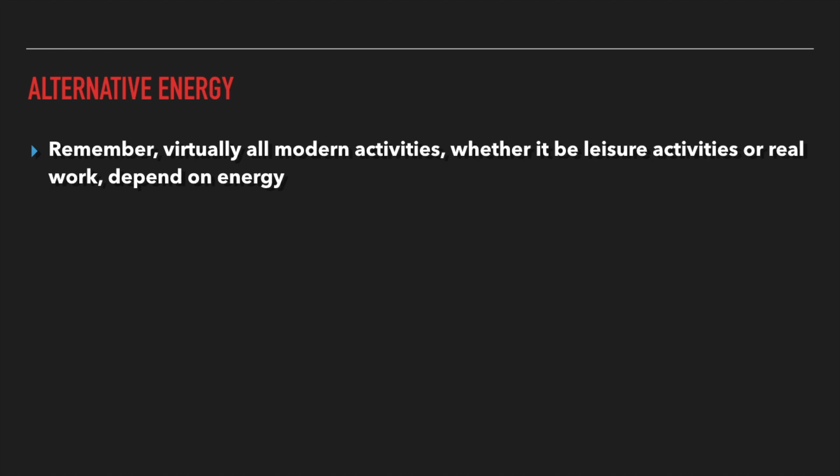What we have to remember is that for all kinds of activities in the modern world, whether it's transportation, leisure, or real work, everything from watching TV to driving your car to doing everything except going for a walk depends on energy, and we use fossil fuels as the go-to method for powering everything.

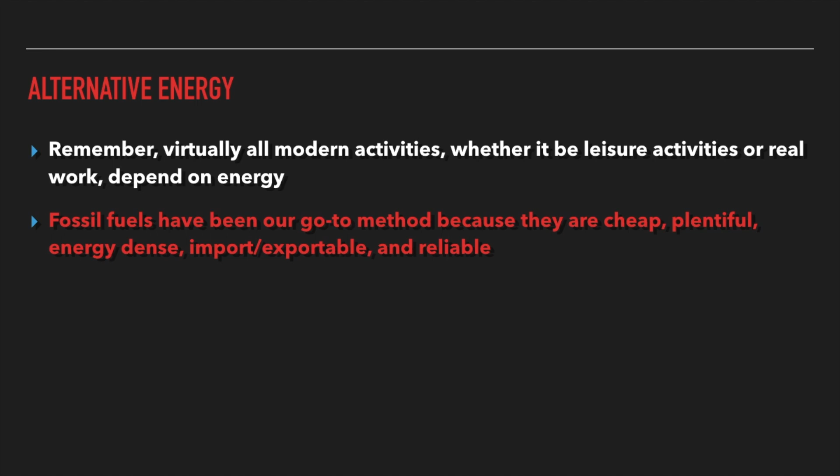The TV is powered by the electric grid, which runs off of coal and natural gas in this country for the most part. We do that because, as discussed in the last lecture, fossil fuels are cheap, plentiful, energy dense, easy to import and export, and reliable. They'll produce energy all day, every day. The goal is either to create mechanical power, which is what your car engine does by burning gasoline, or to make electricity, which is what burning coal and natural gas also do in our electric generators.

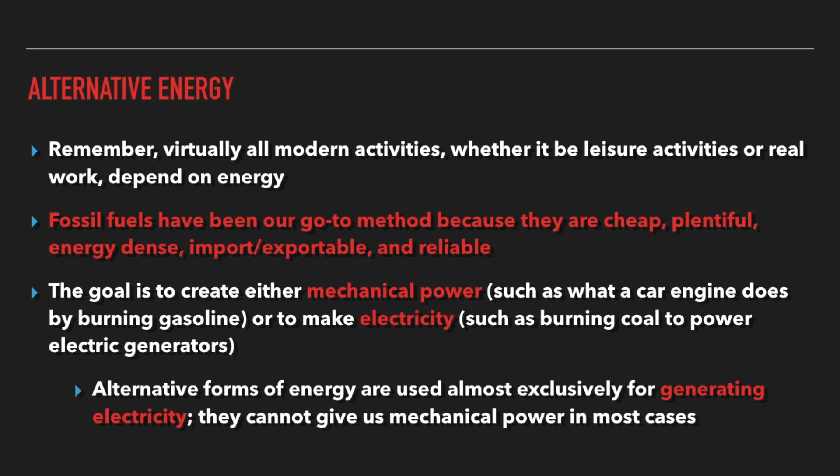Now, alternative energy forms are used pretty much exclusively for generating electricity. Alternative energy cannot give us mechanical power in most cases. So there's no solar powered car - that just isn't possible. There's no uranium powered car, although Ford did obsessively try to develop a car that ran on nuclear energy in the 50s and 60s. You can look that story up for yourself.

So for the foreseeable future, alternative energy can solve many of our electricity needs, but not our transportation needs. That just isn't going to happen. The electric car, I don't believe, should be considered alternative energy, because while maybe it doesn't directly run on fossil fuels, it runs on a battery.

Those batteries are going to be charged by fossil fuels. So to charge an electric car battery with something like a rooftop installed windmill or rooftop installed solar panels would take so much time that it's just not practical, because most of us have to drive every single day. Those just aren't going to meet the need.

But our electric grid, which runs mostly off of coal and oil and natural gas, is going to be able to do that, because ultimately the source for that electric car comes from fossil fuels.

But anyways, the most electricity intensive device in your home is the air conditioning, and if you have electric heaters, the heating. The next most intensive would be natural gas. So in my home, I have central air - there aren't floorboard heaters in the rooms. So the vents either blow cold air from the air conditioning, which uses electricity.

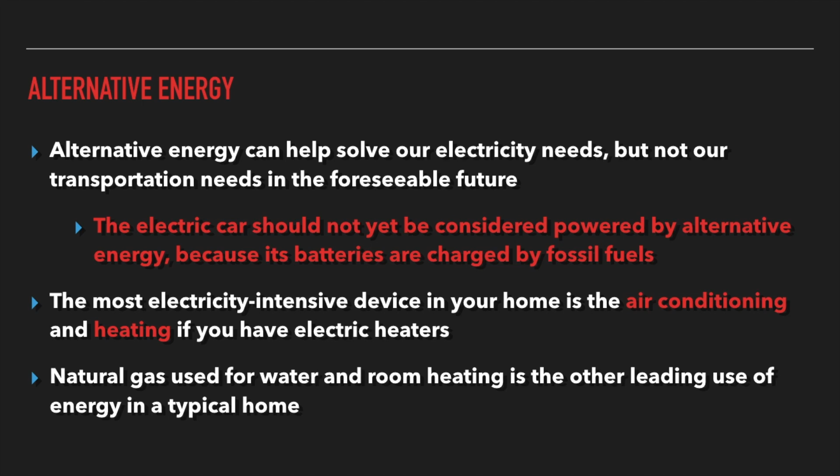Technically, if we have enough hydroelectric dams, nuclear power plants, and wind turbines, our energy grid could be powered mostly by these things and then power our electric cars that way, but it's difficult to say if that's going to happen or not. So transportation, we're not going to be focusing on. This entire discussion, we will be looking at how alternative energy generates electricity - that'll be virtually the case for everything.

We haven't moved away from steam power ever since the Industrial Revolution, where we really harnessed that - that's still basically what we do today. You burn that coal, it heats up water, it creates steam.

That steam is piped through and makes a turbine spin around. A turbine is just a system of fan blades, basically, and that steam turns the turbine. The turbine is then connected to the axle or drive shaft inside an electric generator, and that produces electric current.

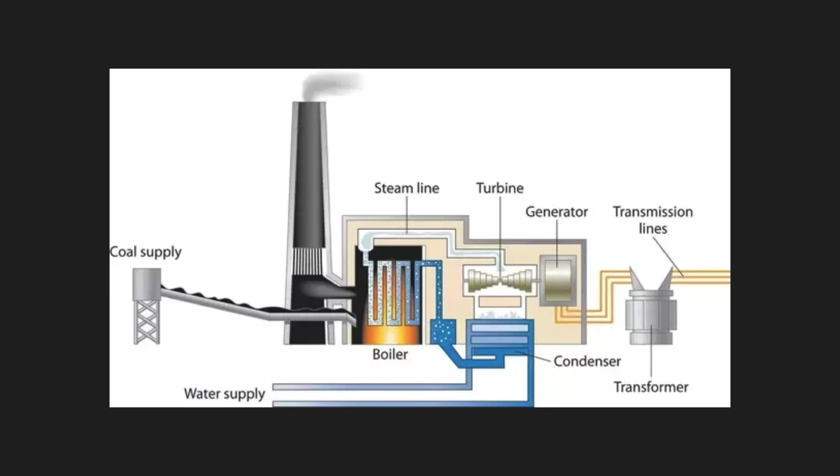So, electromagnetism - we've known about magnets and electricity forever, but it wasn't until the 1800s that we figured out they're really connected. You can use electricity to generate a magnetic field and vice versa.

So what these things do is you get that drive shaft spinning, and that spins the magnet, and that creates an electric current.

Electricity and magnetism - there has to be movement associated with that. They won't create electricity if they're just sitting there, but if you incorporate some movement into it, then it will work. So that's how virtually all, or at least the majority, of these alternative energy forms and fossil fuel electricity generating forms work. They're just trying to get an object to spin like this.

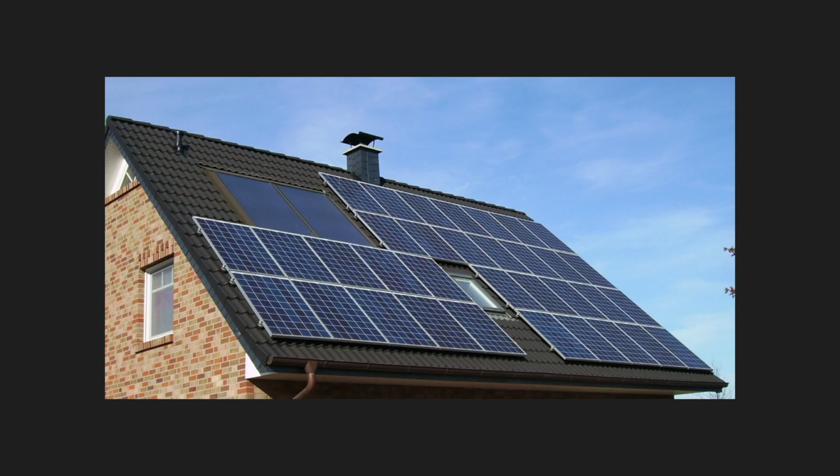Now, if you live much further north than what we do, solar panels are a terrible option, because for so much of the year they're not going to be producing energy or generating electricity for you - it's just not a great option. Now, luckily, it's pretty far north that you'd have to go, quite a ways north. You'd have to be all the way in Alaska for that to not make sense for you to do.

The other problem that we have was - let me see if I have something here.

No, I don't. That's weird.

The other problem with solar panels, I forgot to add this: for the most part, most people have jobs, or if you don't have a job, you're probably in school like you guys, for most of the day. So at home, from around 8 in the morning to 4 in the afternoon, that's peak solar energy hours, the peak time where your solar panels could be collecting or making electricity. But nobody's home to use it. All the lights are turned off, most of the devices are turned off, so this electricity is sort of being wasted.

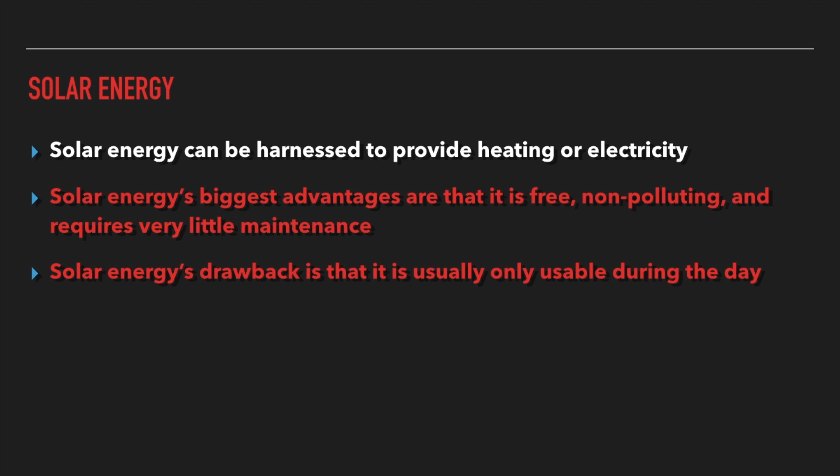Right now, we don't exactly have great methods of storing that electricity. If we could capture it throughout the day while you're gone, and then come home and use it, that would be perfect. There is a program, some technology for that. I'll get into that in a little bit.

So anyways, these are solar panels. We all know what solar panels look like. You've probably never seen them before. I have only seen solar panels a few times myself. Nobody around here really has them. But there we go.

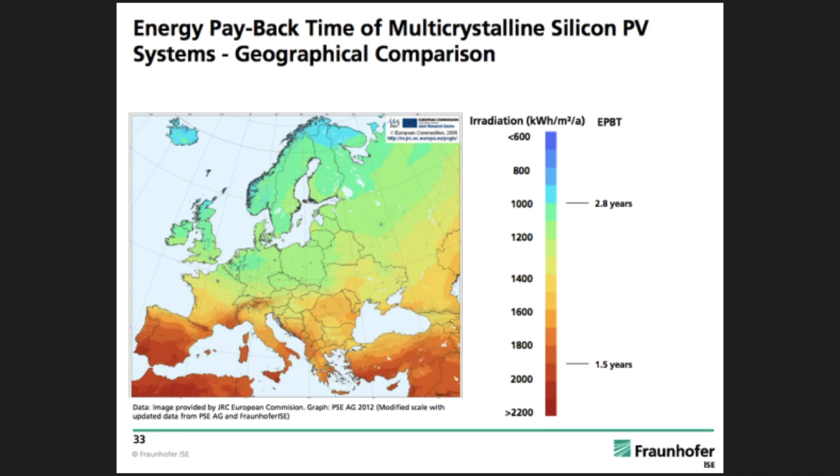Potentially, I don't know if this is based off one or two units, but if there was a blackout, maybe you could go an entire week. You'd probably want to be smart and not use the TV very often, because what you need is to be able to cool or heat your home and have your refrigerator working. TV can wait. But never mind solar panels and alternative energy — blackouts are very rare, but they do happen. This is a rather smart idea for any of us if it could store that much energy.

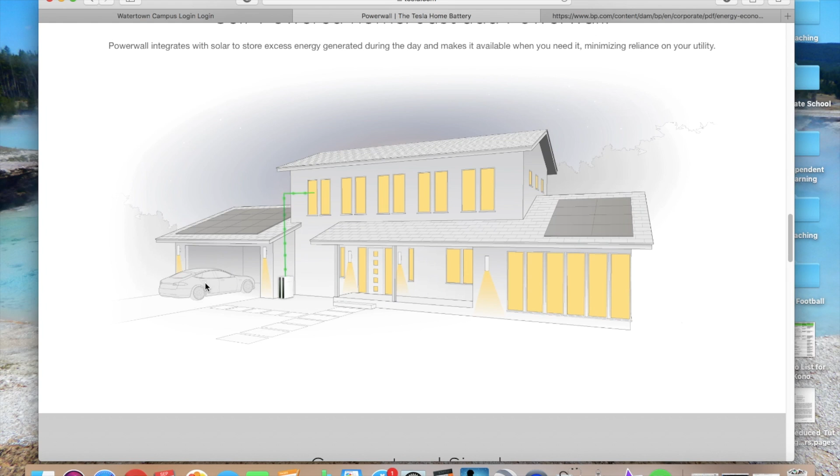So here in this image, we can see solar panels, and they're constantly feeding electricity into the device. Then you come home where it's dark, and your solar panels aren't directly giving you any electricity, but your battery pack is. If we look in the interiors of these things, it's really simple—just a gigantic battery pack with only a couple other things in there. Very simple, very low maintenance.

That's the other great thing about electric cars and electric motors—they have very few to no moving parts. A solar panel has no moving parts whatsoever. They just sit there.

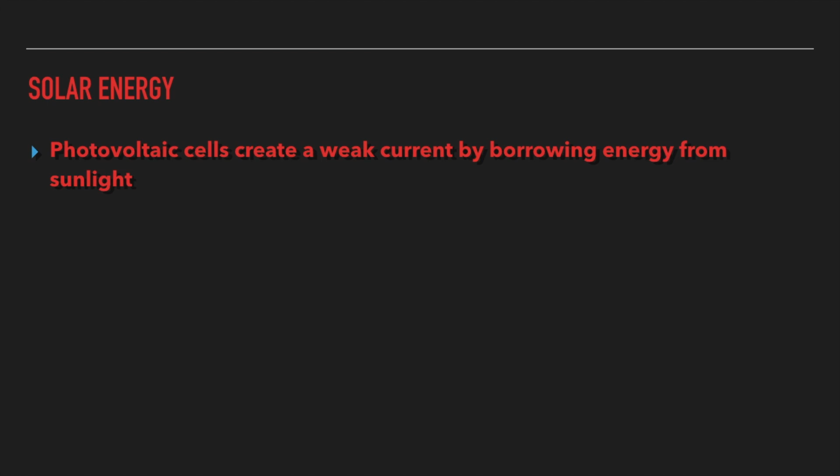Solar panels are made of what are called photovoltaic cells. I really don't know how they work, but the sunlight strikes them and it basically acts as a weak battery and creates a constant trickle of electricity.

But we don't necessarily need to be making electricity. We can also reflect light and concentrate that light to a tower, which if you concentrate a lot of sunlight with mirrors, it gets incredibly hot. So this is just another way of making steam.

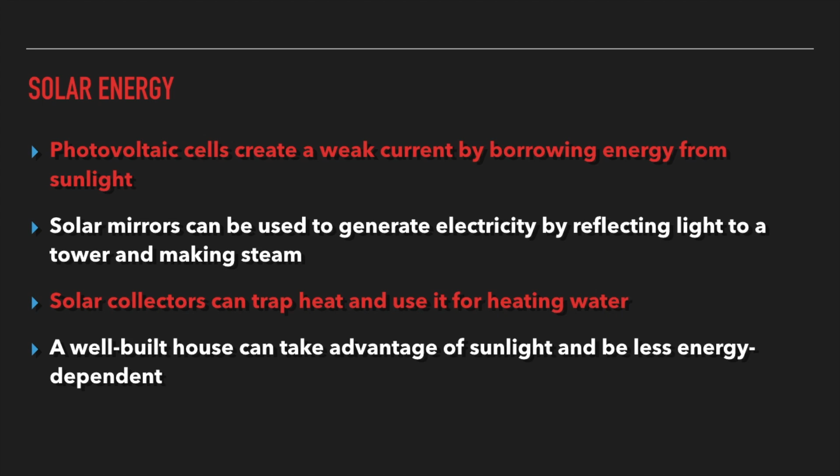A solar collector is basically a black box that can go on the roof of your house, and if you live in a place that's warm year round, it can trap enough heat to heat water—which is a significant use of electric heat or natural gas in homes. A well-built house can take advantage of sunlight and be less energy dependent. So that's another way we can harness the sun.

Here's a diagram of a photovoltaic cell. Again, I really don't know how they work. I know how batteries work—it's a flow of electrons through the battery, and they go dead when the electrons are evenly dispersed. Somehow these photovoltaic cells are able to make electrons basically be in constant motion, and that's what causes the constant trickle of electricity. It's very little electricity, granted.

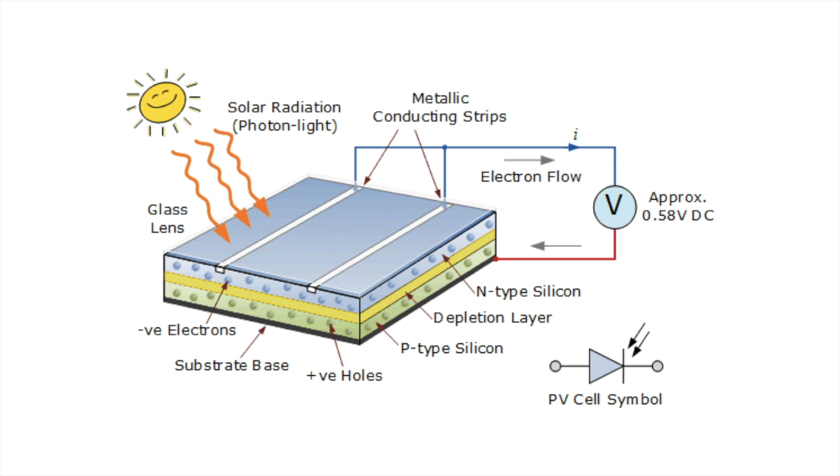This is a diagram of what a solar collector looks like. I don't have a picture of one on a house, but you can Google that and see it for yourself.

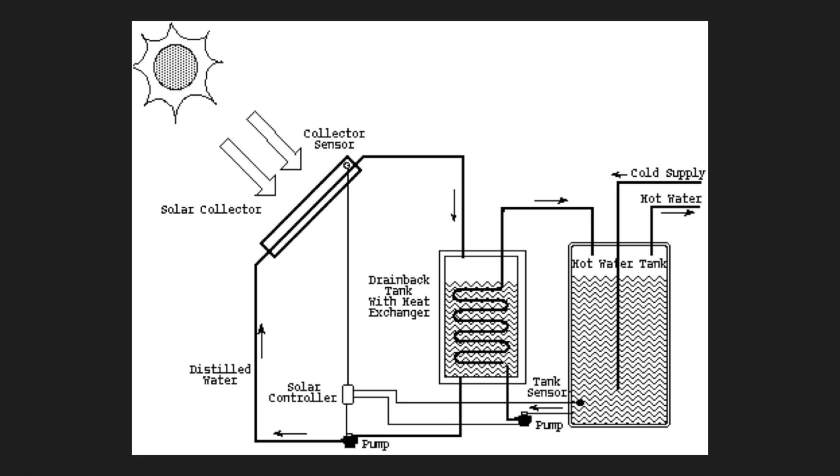This means in the winter, if you just leave your windows open, the sunlight will come through the glass, and solar, like UV radiation, is absorbed and collected that way. So you will need to burn less natural gas for heating or use the electric heaters in your home less often.

Similarly, if you live somewhere very hot—like in my house, I have south-facing windows that are really big, but I have blackout curtains that I buy, and it's pretty amazing.

For a little while I didn't have these blackout curtains, and on really hot summer days the inside of the house would get to 80 degrees by 10 or 11 in the morning. Now with the blackout curtains, I can go until 3, 4, or 5 in the afternoon before I even have to turn the air conditioning on. They work very well.

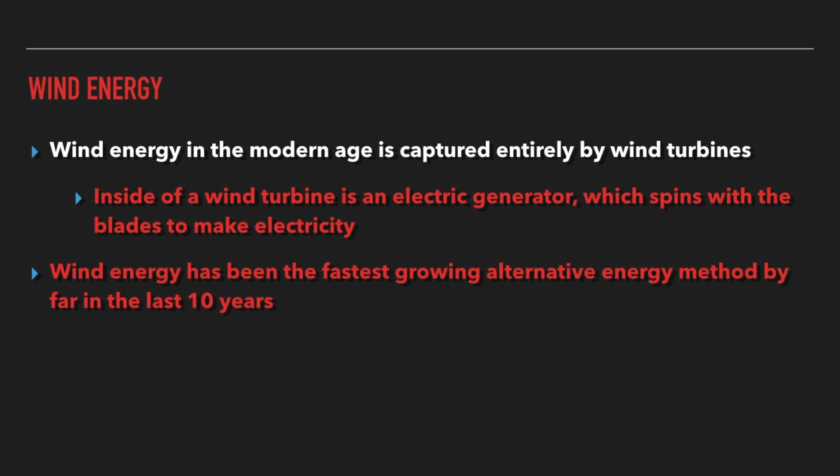It's crazy. I drove this summer from Sioux Falls to a town about 100 miles east of Sioux Falls in Minnesota, and for 50 consecutive miles we saw wind turbines the entire way. It's really crazy how much they've grown.

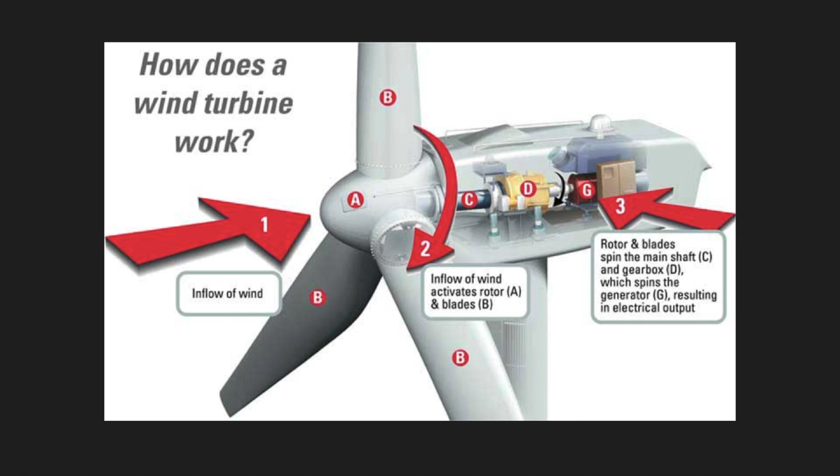So this is sort of the inside of a wind turbine. Nothing too special, just an electric generator, and down through the main shaft of the wind turbine will be the wires and everything to connect it to the grid.

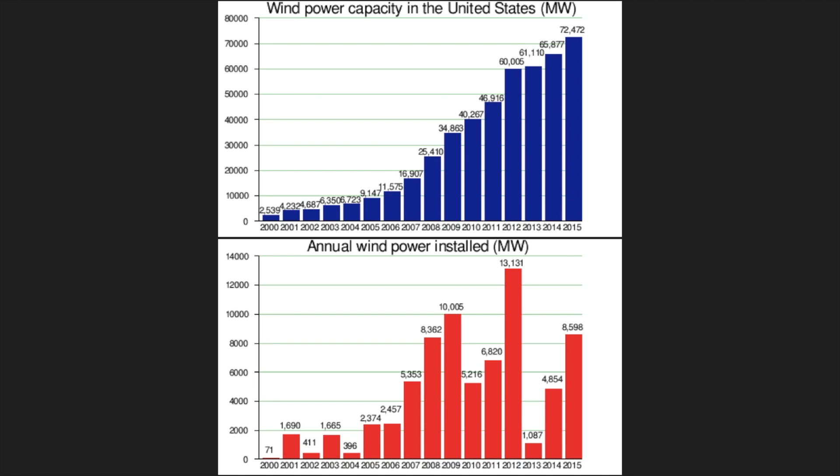So the top graph is the overall capacity. The bottom is how many new wind turbines we built, and therefore how many more megawatts are produced from that. So the top is total, the bottom is growth from one year to the next. From 2012 to 2013, we didn't lose any wind turbines or anything like that, we just, I don't know why, built very, very few of them that year for some reason.

In the United States, as far as wind producers go, Texas leads the way with something like close to 45,000 megawatts, which is a huge number. Texas is one of the biggest states.

It's a pretty flat state, not bothered by lots of mountains or anything like that, so they've got quite a large area to spread all that stuff around. Iowa is number 2, which is pretty surprising. South Dakota, where we are, ranks number 17. Connecticut and North Carolina are the only 2 states that do not produce any electricity through wind, which is kind of surprising, but they'll get there one day, maybe.

The drawbacks with wind power are that the supply is intermittent, meaning it comes and goes, and the infrastructure and land use demands are gigantic. The wind is not always blowing. Most wind blows during the day, which is luckily when we need most of our energy or electricity, so I guess that works out. But it comes and goes at random times.

Getting back to infrastructure needs, it takes around 550 tons of iron and steel to produce a megawatt of power from wind. By comparison, it only takes 34.3 tons of iron to get a megawatt by burning coal, and only 5.2 tons of iron and steel to generate a megawatt of electricity using natural gas.

Oh wow, I was really wrong. So in North America, it's about 10 times more than I thought. Now that is a big number, but domestic house cats kill something like 3 billion birds every year. Billion. And through hunting, we kill millions and millions of them on purpose. And with our cars, we kill millions and millions of birds every single year. So yeah, it's too bad that birds die, but we're not gonna stop driving our cars, we're not gonna ban hunting, and we're not gonna get rid of all of our cats anytime soon. So that's another one that's just a non-starter to me. If anyone says that, pull up some statistics on how many birds are killed through hunting or even agriculture. We farm chickens and stuff, and we kill them by the tens of millions for that.

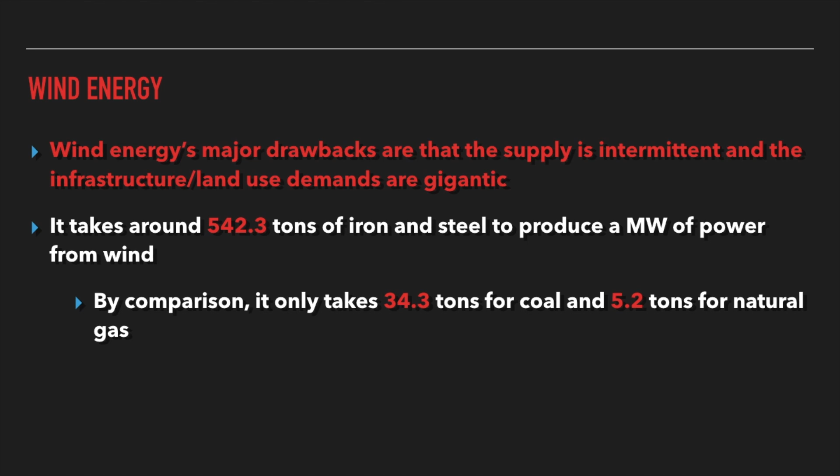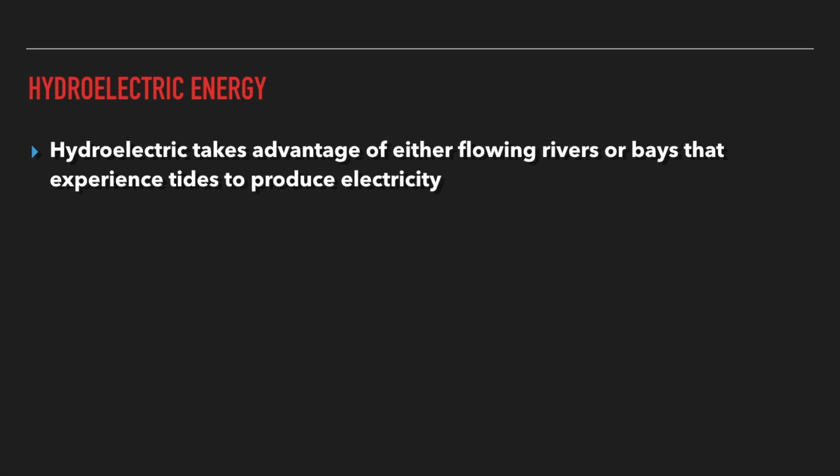Moving on to hydroelectric power. This takes advantage of flowing rivers or bays that experience tides to produce electricity. So what we do is build a dam, and it converts the high potential energy of the reservoir of water behind it into electricity by having that water spin a turbine. So there's no steam being made, but the flowing water has a lot of power, if you've ever stood in a fast-flowing river you can feel just how much power they have.

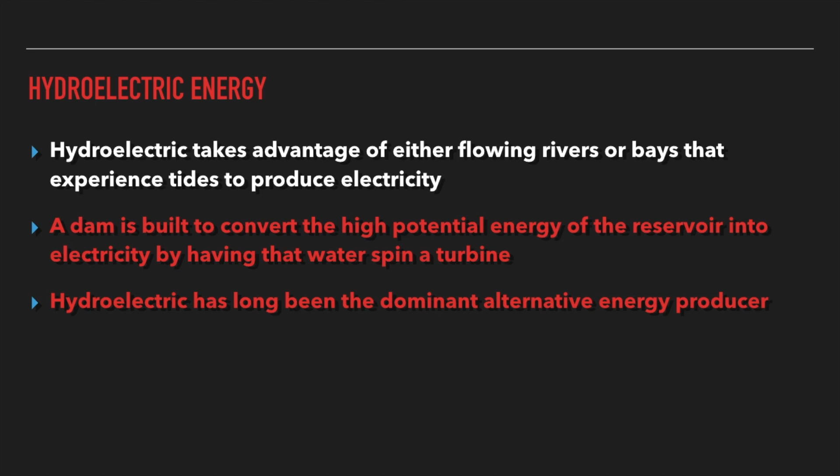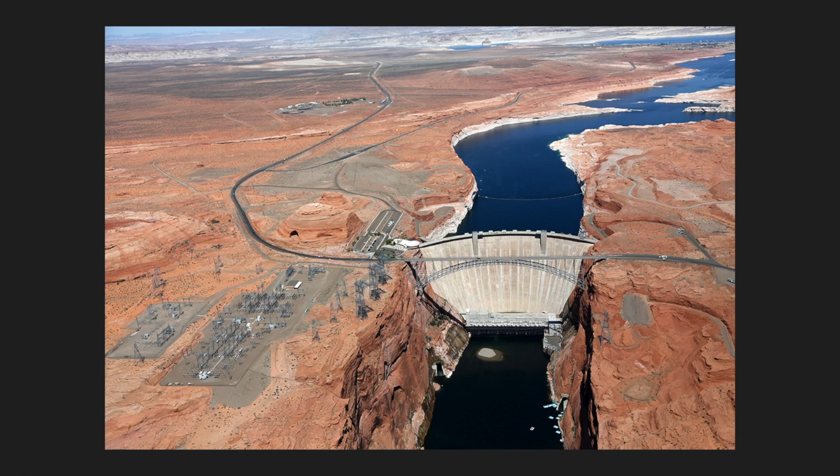So here's a dam. This isn't the Hoover Dam, but this is a dam in America, I can't remember which one. We can't see the internal guts of the dam, but I do have a picture for that. To the left of it are things I don't really know what they do, but next to power plants, we have these things that kind of look like telephone towers or poles. Those are regulating the electricity and sending it out.

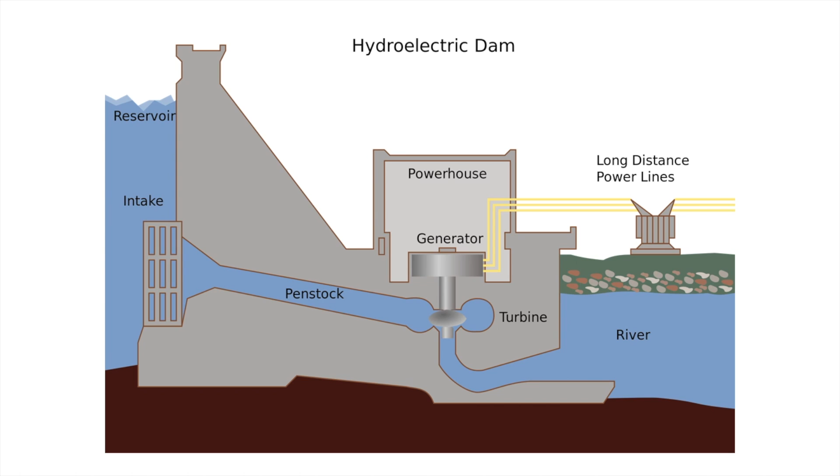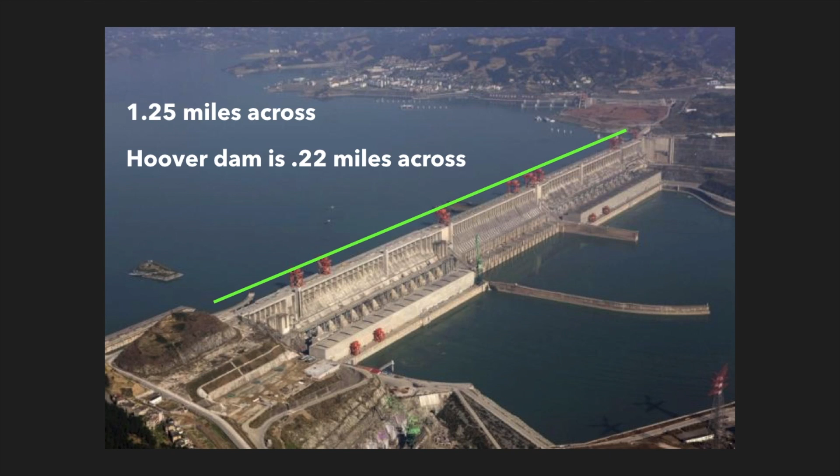This is the largest dam in the world, called the Three Gorges Dam, in China. It's 1.25 miles across. The Hoover Dam, by comparison, is not even a quarter of a mile across. This dam is straight across, whereas the Hoover Dam is curved, and dams like that curve backwards into the part of the river that's lifted up, because if you curve it, it's much stronger. In reality, I followed the curve when I measured 0.22 miles, so it's actually only 0.16 miles across.

Now this dam in China, this structure is just unbelievably huge. The amount of concrete that is in that dam, there's more cement in there than the entire country of the UK uses for all of its building projects in a year, to give you an idea of how big that is. It's gigantic.

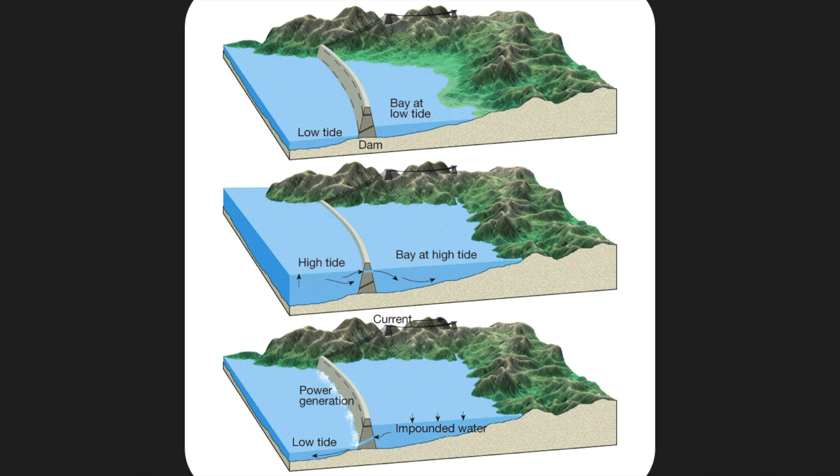Tidal power, what happens is you can do it in different ways. You can build kind of what's like a dam, and then it fills up with water, and then as the water drains out, in this example, it just drains out fairly slowly and is used to generate electricity, the same way a regular dam does.

But nowadays, with tidal power, we don't really need to construct a barrier. We can basically put underwater windmills there, and because tides flow in and out of bays, the movement of the water will simply turn these things. Now, I imagine it turns them pretty slowly, but tides are constant, whereas the wind is not. I don't know how efficient these are, but in theory, by looking at it, we can see that it's probably a fairly constant way to make electricity.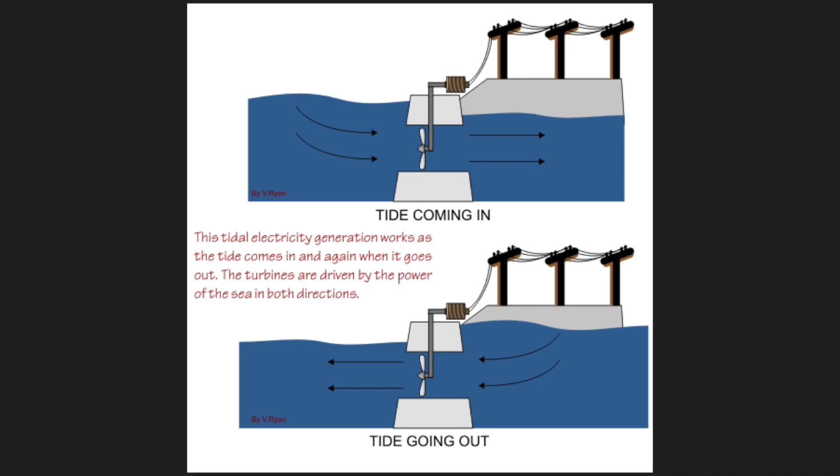The biggest advantage to hydroelectric, why it's been so successful and popular, is that the water is always flowing. It's not the case with the wind or with the sun, but the water is always there. And because when you build the dam, it's self-contained, we don't have to ship in any fuel. Like if you run a power plant, you have to ship in uranium, coal, or natural gas. But the dam doesn't, which means the electricity made from it is pretty darn cheap, which is really good.

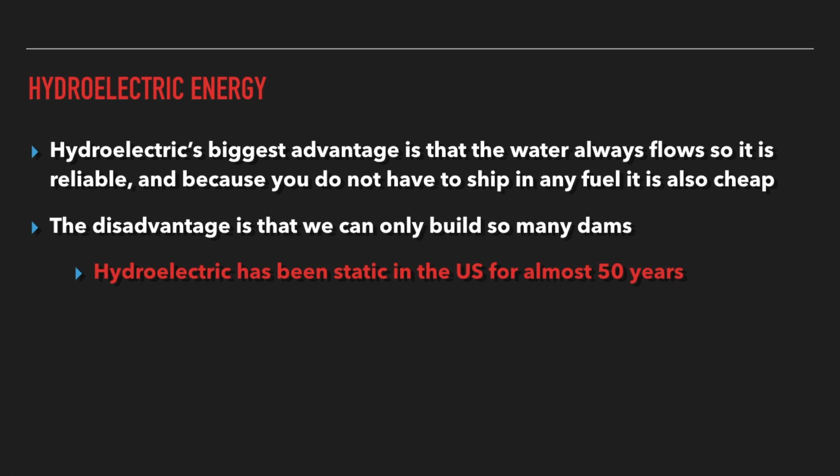The disadvantages are that we can only build so many dams. In the United States, there's virtually nowhere left in the country where we can build dams. There are probably a few spots, but it's pretty much taken up. For that reason alone, hydroelectric has been static in the US for almost 50 years. We'll go back to that picture and you'll be able to see that. Worldwide, hydroelectric accounts for around 6% of global electricity. I don't know what it accounts for in the United States off the top of my head, but you can look that up. We think it has the potential to double around the world, but not much more than that.

The other problem is you just can't do it everywhere. In South Dakota, maybe, there are dams in South Dakota. We have a few dams at Fort Thompson. There's a dam there, and there's also a dam right next to Pierre. But that's about all we can get. In other states like California, they can build lots of dams because they have high mountains and lots of streams that have a lot of energy in them, so they can take advantage of that.

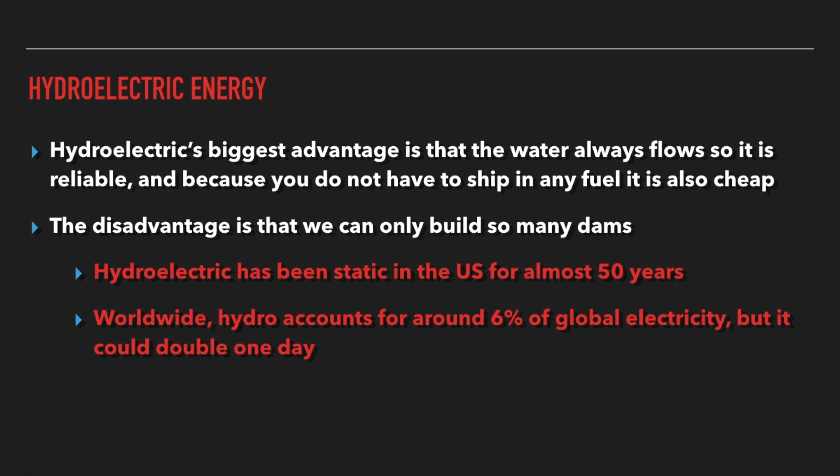The other disadvantages associated with hydroelectric power are environmental concerns. When you build a dam, that leads to an extreme rising of the river channel upstream, which clears out all kinds of habitat, obviously. And if people live there, they have to pack up and move all their belongings because their house is going to be flooded.

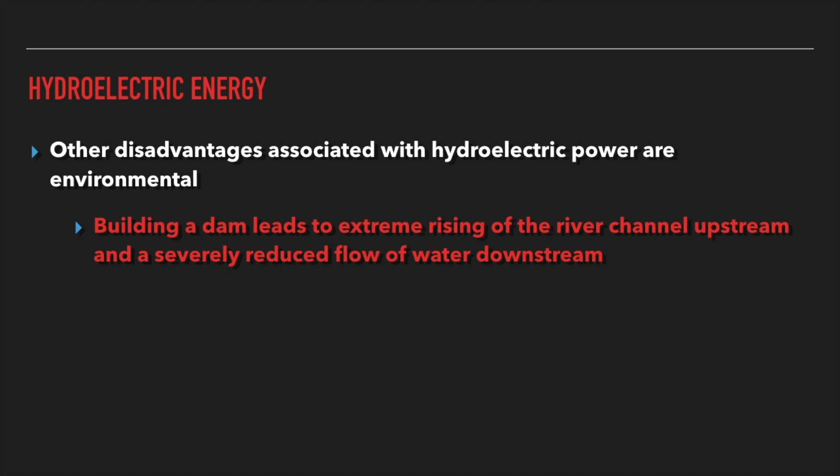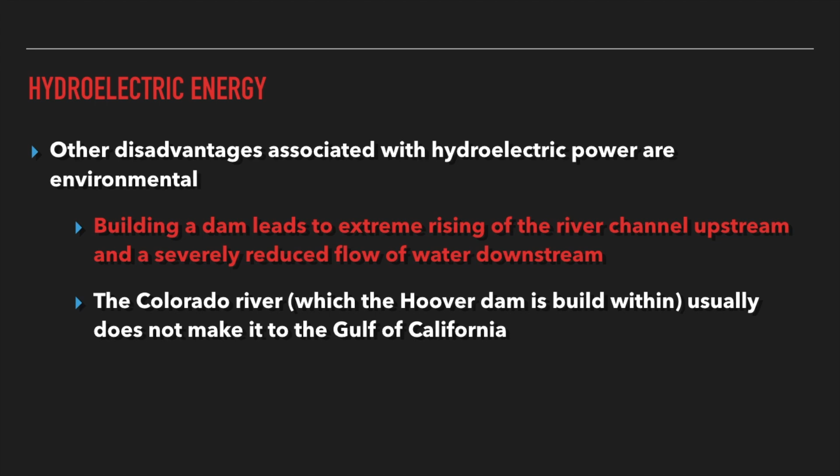For people that live downstream from the dam, a dam does not pollute - that's an advantage I should have mentioned. There's no pollution with dams, but the amount of water that flows downstream is severely reduced. For example, the Colorado River, which flows through the Hoover Dam, actually doesn't reach the ocean anymore. It has for forever and ever, but now there are so many dams built on the Colorado River that the water doesn't actually reach the ocean. The river just kind of dries up, which is a little weird.

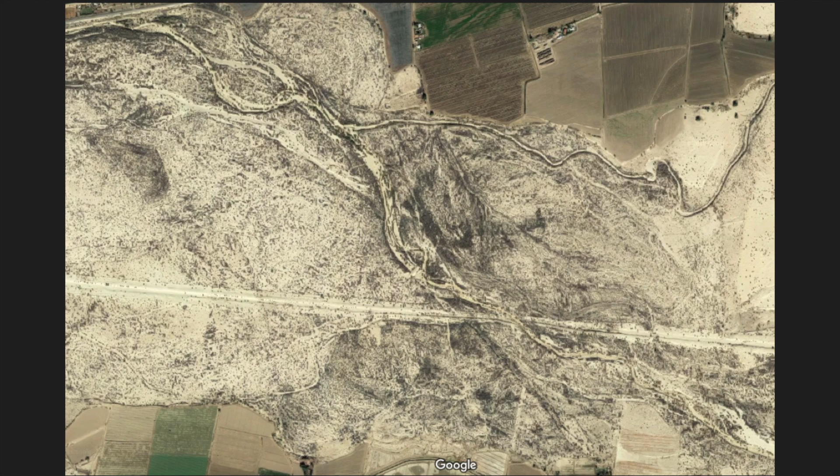But the more often you do this - and in China it's a much bigger problem - the less water flows downstream. China has a gigantic population, but many of its people still live very, very simple agricultural lives, and they're obviously hugely dependent on water. China has a communist government - yes, they're capitalist, they have a very large economy, but they are still a communist country, which basically means when the government says they're going to do something, you really don't have any choice.

You're going to cooperate with the government or be arrested or something like that. So these people that live down the river don't really get a voice in their government to say, hey, you're going to destroy our way of life if you do this. The Chinese government says, too bad, so sad, you got to pack up and move or deal with it. Similarly, with people that lived in this area that's now flooded out, they don't get a voice either to say, hey, you're going to destroy my house, the least you could do is pay us for it. There was some compensation, but not nearly enough.

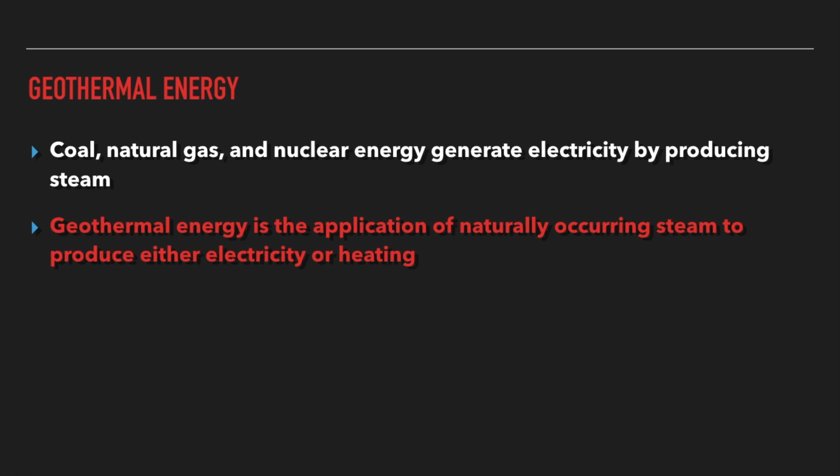All right, moving on to geothermal energy. Just to reiterate, coal, natural gas, and nuclear energy all generate electricity by producing steam. Well, geothermal cuts out the middleman - it's the application of naturally occurring steam, so we don't have to burn anything to get our steam. We can use geothermal for making electricity or just directly for heating.

I don't have too much to say about geothermal energy, but the countries that produce the most tend to have a large number of volcanoes. This makes sense because there are very few places on Earth where geothermal energy can be used. If you live somewhere with volcanoes, the magma below your feet is much closer to the surface than in other places, so the crust is much warmer at shallower depths, and there's groundwater all over the planet. So this is what makes the steam.

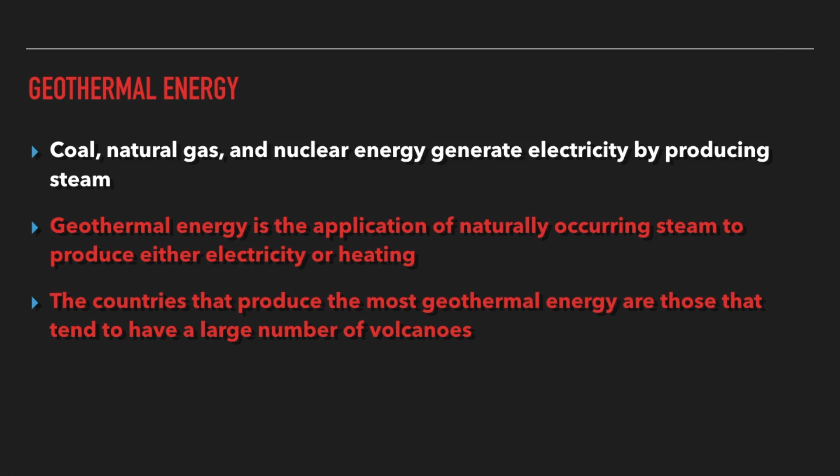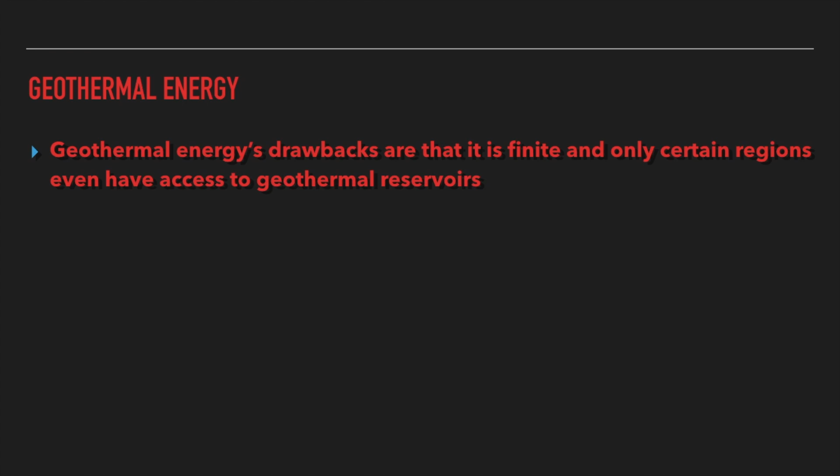The drawbacks to geothermal are that there's only so much steam trapped down there. I don't know the average lifespan of a geothermal plant off the top of my head, so you can look that up. There are very few regions in the world with access to geothermal reservoirs. In fact, there are only 12 countries in the entire world with a reasonably large capacity for electricity generated by geothermal, and it's really not very much.

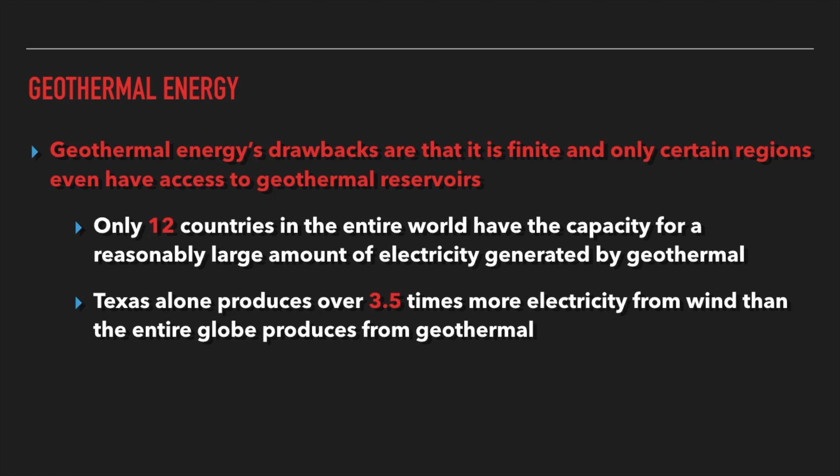The top there is the United States—I'll wait to explain that here. Just to show you how small a footprint geothermal energy has, the state of Texas alone produces 3.5 times more megawatts of electricity from just wind than the entire globe produces from geothermal energy. So it works very well for some people in some locations, and by all means, if you've got it, we should use it, but it's not the answer for the future by any means.

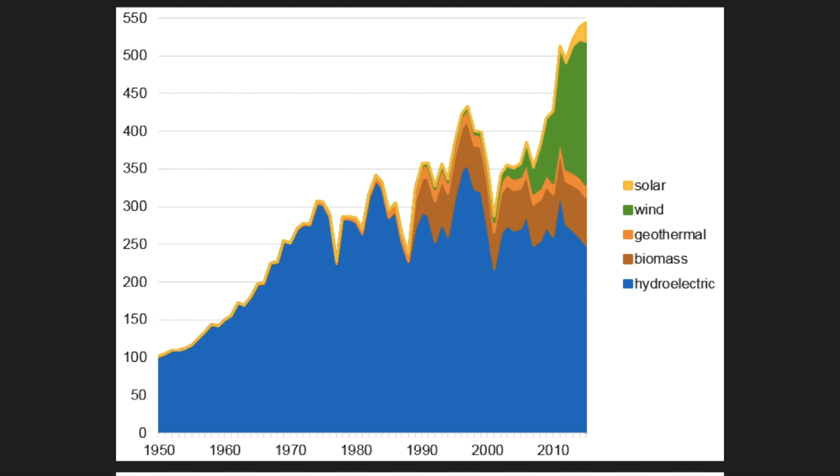Geothermal is right in the middle there, directly underneath wind, so it's a pretty narrow margin. It's been about the same width—if we look, it first really pops up in 1990, and it's pretty much had the same share for that entire period. So it's really not a growing sector.

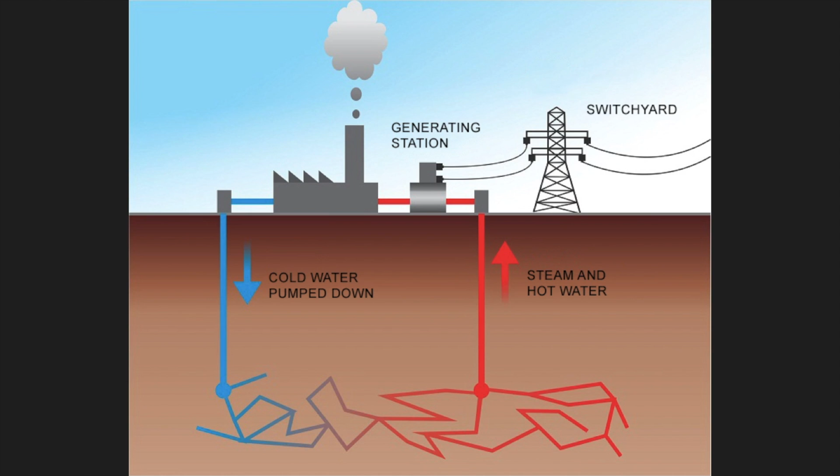Here's an example of what a geothermal plant looks like. This is in Iceland. This picture has cut away the turbine and all that, but it works exactly the same as a coal power plant, just without having to actually burn anything in there.

The other thing I was talking about is countries with lots of volcanoes. The United States actually has a pretty decent share of volcanoes, if you didn't know that. The Philippines is a system of islands in the Pacific, all made from volcanic processes. Same with Indonesia—the famous Krakatoa was the biggest eruption in hundreds of years. That's an entire volcanic archipelago of islands, north to northwest of Australia.

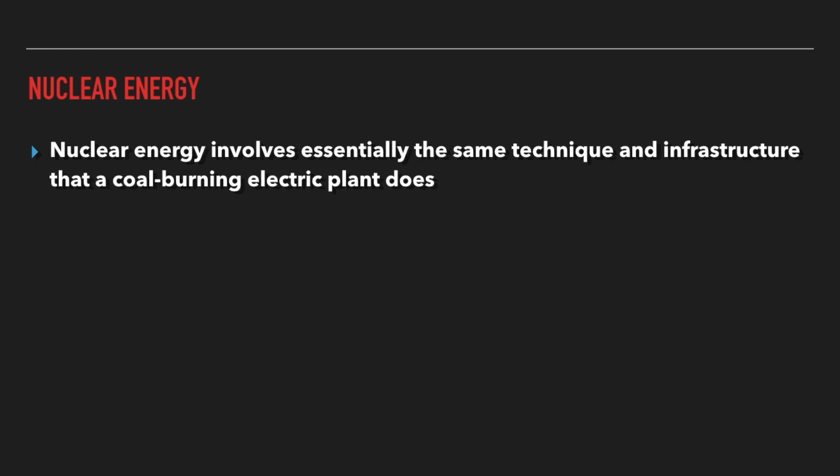Now to nuclear energy. We saved this for last. Nuclear energy, more so than any kind of alternative energy, is probably the future because it shares so many of the exact same advantages with fossil fuels, except that its energy density is literally millions of times greater than fossil fuels.

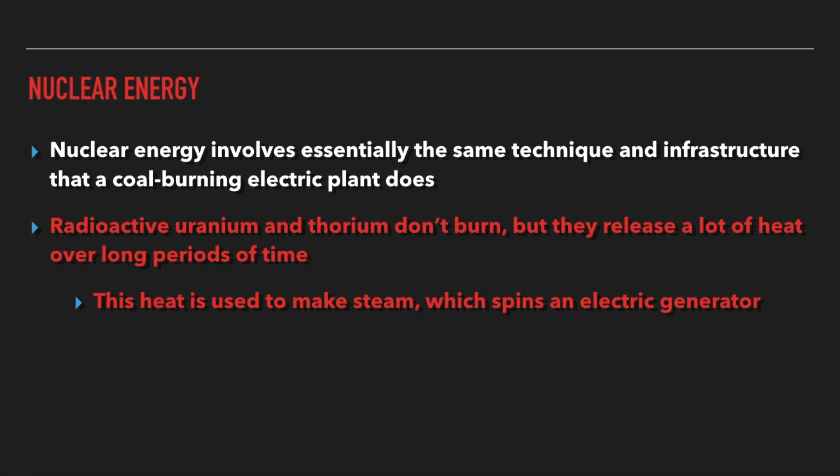The process of making electricity with nuclear power is the exact same as a coal power plant. The uranium and thorium that are used don't burn, but they naturally release a lot of heat because they are radioactive, and they will do so for long periods of time. That heat—you keep these radioactive bars in water, and it heats up the water and makes steam. If we compare this to the diagram at the beginning with the coal power plant, they're designed almost exactly the same.

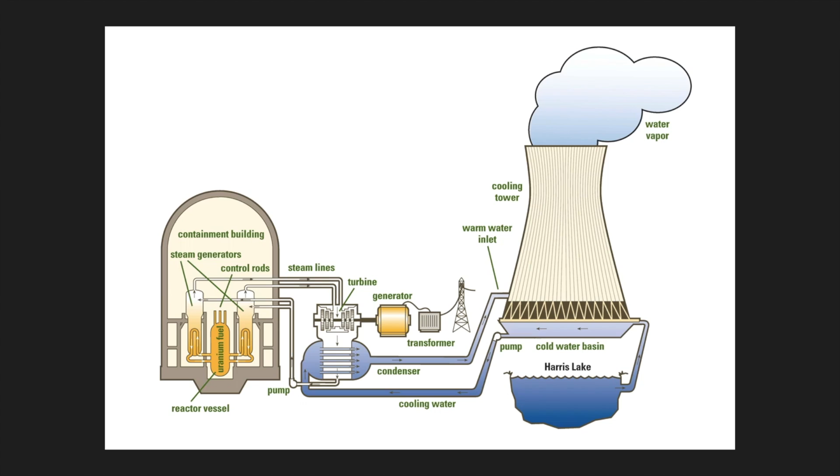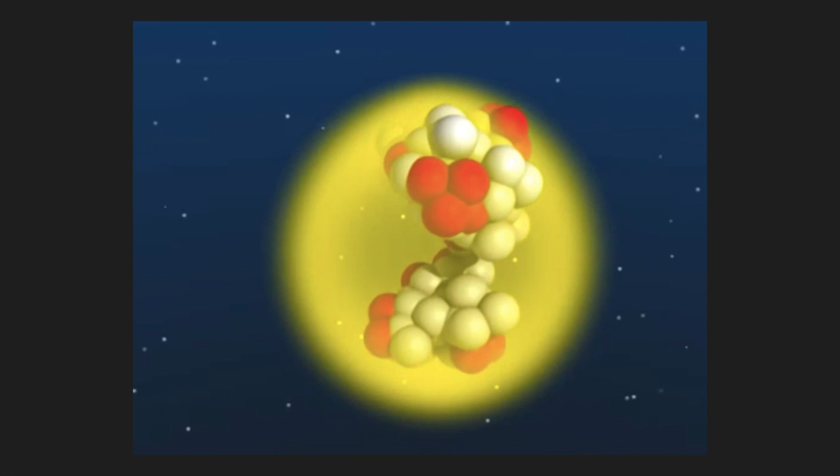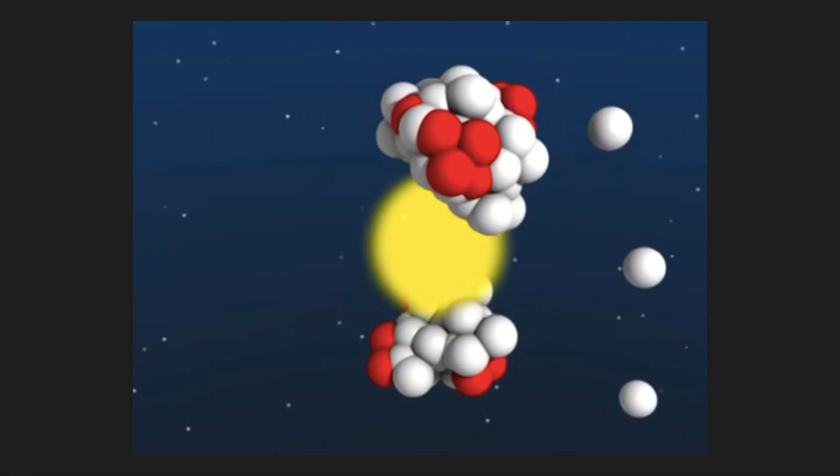This GIF here—so what the heck is going on with radioactivity? Well, on the atomic level, it's a gigantic chain reaction. What's actually happening is that uranium is being split apart. A neutron strikes the nucleus of an atom and it breaks it apart. Now, to split the atom requires an unfathomable amount of energy to do, and it releases a huge amount of energy. This is how atomic bombs work. They're so energetic because they can create energy in huge proportions. That's what E equals mc squared actually means.

Now, once a nucleus is split apart, it releases 2 new neutrons plus the original one, and those will go and bombard 3 new nuclei. So this is why it's a chain reaction. This is also why it's incredibly important that nuclear power plants have systems, regulations, and controls, because you can see I just went from 1 to 3. 3 will become 9, 9 will become 27. You can see that in fractions of a second, this could cause the entire uranium core that you're dealing with to split apart, which would be really dangerous.

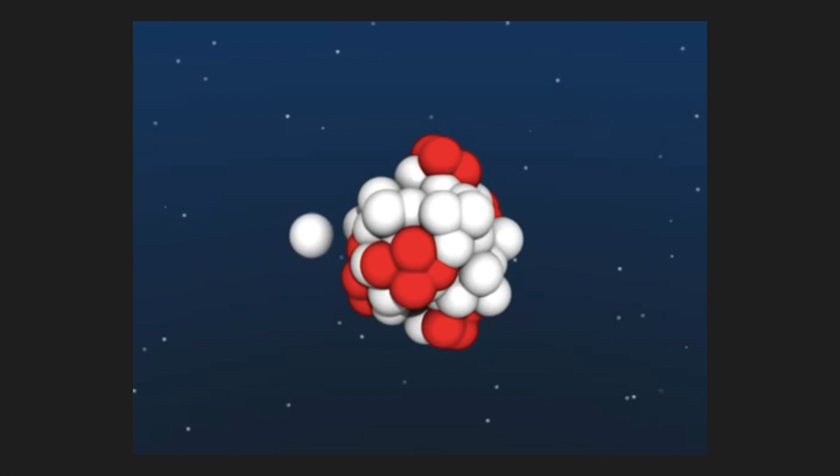That's when a nuclear meltdown happens. Now, the materials that are inside of nuclear power plants, they can't explode, so they're not like nuclear bombs in that way. Even though nuclear bombs can be made with uranium and power plants can too, there are different isotopes of uranium, and they don't all have the same physical properties. So there is no radioactive substance used in power plants that can blow up. It's not possible.

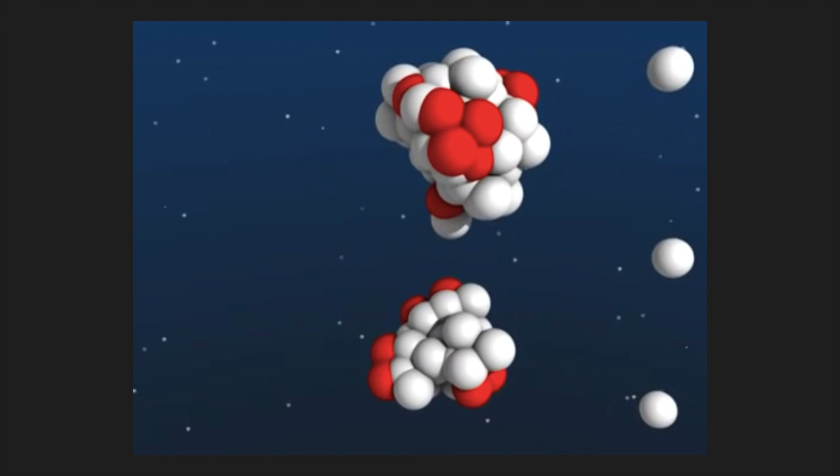Nuclear actually provides a pretty respectable share of electricity in the United States. It's around 19%, but it hasn't grown in many, many decades. Again, the reason nuclear is such a good option is because it has all the same advantages of coal. It's a solid, so it's really easy to transport from one place to the other, and it makes electricity pretty much in the same way. We know how to build coal plants, so we know kind of fundamentally how to set up nuclear plants.

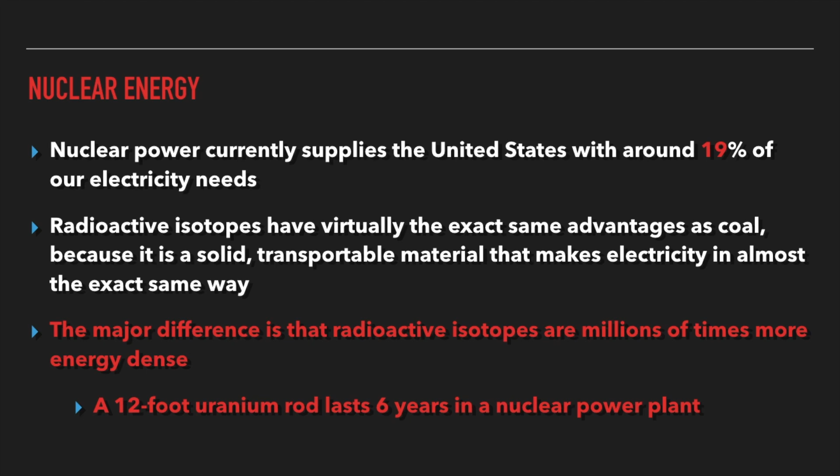The major difference, though, and this is a good difference, is that radioactive isotopes are millions of times more energy dense. A 12-foot uranium rod lasts for 6 years in a nuclear power plant. In 6 years, a nuclear power plant will burn through—well, maybe millions of tons is an exaggeration, but definitely many hundreds of thousands of tons of coal. I don't know the exact figure, you can fact check me on that. But that's a huge advantage—it's just one relatively small piece of uranium, and it lasts for 6 years.

We looked at this graph in the last lecture, or maybe it was the first lecture, I don't remember, but there's uranium and thorium at the top, and look at their energy density compared to coal. It's huge.

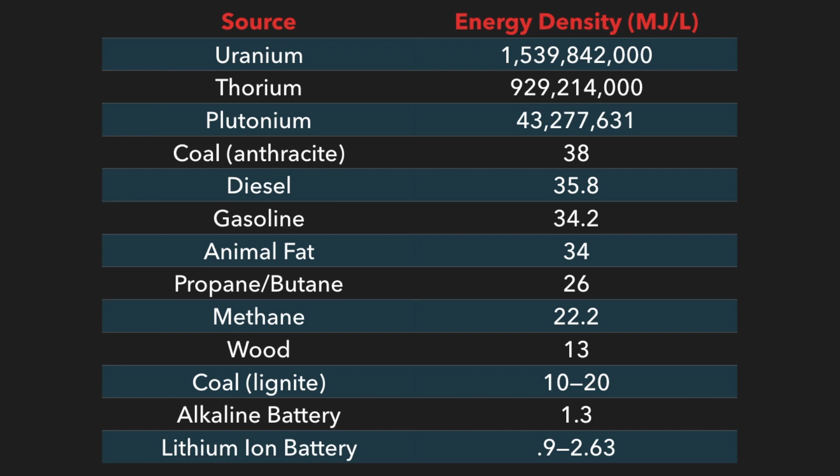Now, in practice, because we have to use the uranium to make steam, and because we lose some of that energy due to inefficiencies, it doesn't exactly work out if you just divide these numbers. But it is thousands of times more efficient per unit of weight than coal, which is very good news.

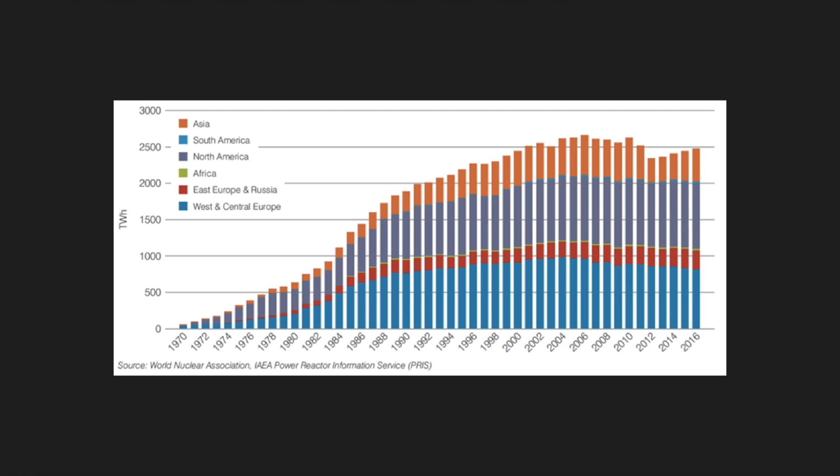So, gee, I wonder what happened in the late 80s to stall the growth of nuclear power. Oh yeah, Chernobyl happened. They were doing some safety tests, going through a scenario where they were trying to test what would happen if part of the reactor was not working right and they had to try a different method. But they were doing it with live materials, and they didn't have the right fail-safes in place, and the chain reaction very quickly got away from them, and then it exploded.

And this was a really terrible disaster. Many people lost their lives, and many thousands of people actually developed cancers after this. So it really put a dark stain on nuclear energy. But this is the only incident in the entire world where nuclear energy has claimed any lives. There were other instances - the most recent one was Fukushima in 2011 in Japan. Nobody died from that. We don't know if anybody has developed cancer from that either, but there haven't been any studies that show it had. And then the United States had one also, in the 70s I think, at what's called Three Mile Island, so you can look that up for yourself.